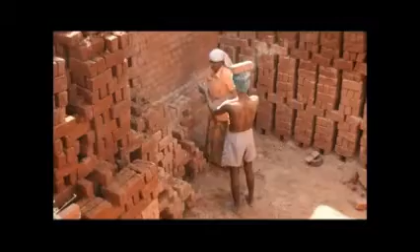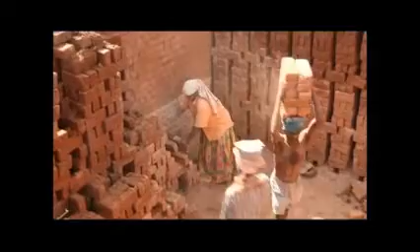The labor involved for the production of bricks is completely high. The process of manufacturing a brick takes a very long time. Women and children are swept off from their future for the inhuman labor that is involved for manufacturing bricks. The manufacturing involves a lot more physical labor than mechanical labor.

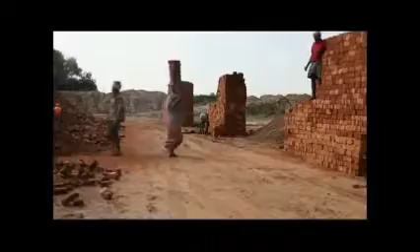Every nation owes it to the success of its laborers. Since the Industrial Revolution, labor has been the driving force of our economic and industrial progress. Though labor has its advantages, the rich get richer and the poor get poorer. Families suffer.

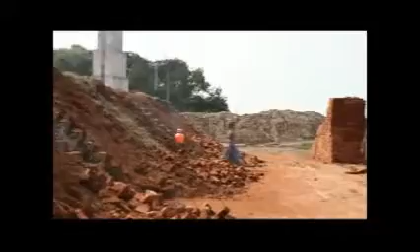We will show you the relationship between electricity and bricks. Our lives revolve around electricity all the time, making our city look so attractive. Here we are looking at one of the most important power plants to day-to-day life. For the production of electricity, coal is the primary source.

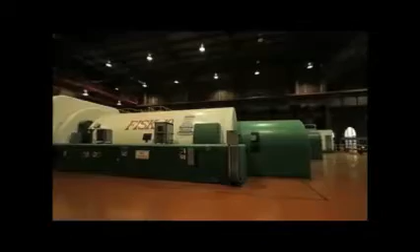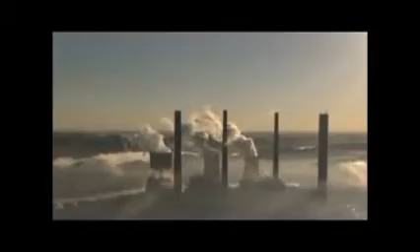How do we generate electricity? Yes, we all use coal. Coal is the primary source for everything. Neyveli supplies fly ash to different parts of Tamil Nadu. Right now we take a virtual tour of an electricity producing power plant which uses coal as the primary source for it.

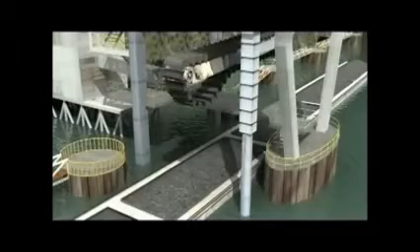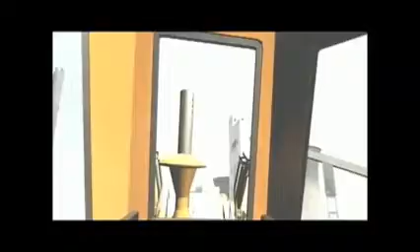Coal, as we all know, is transported from various parts of the world and is used for producing electricity. Coal is collected first and then a conveyor belt is used to collect everything and roll it towards a container.

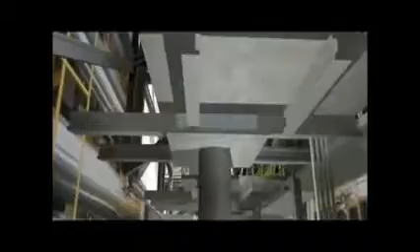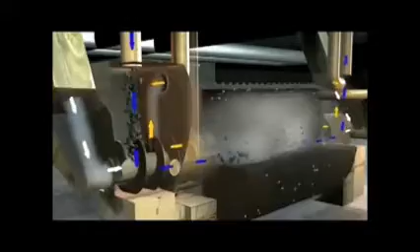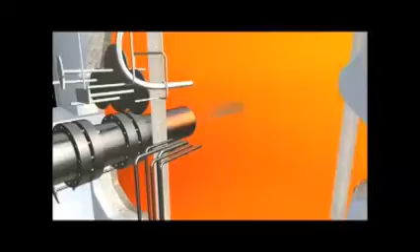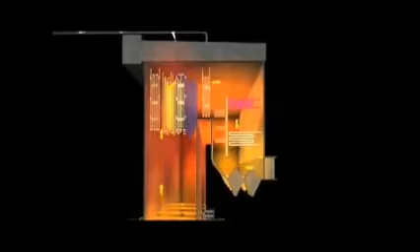The next important step is to crush the coal into fine powder and then feed it into an inferno of a boiler. The boiler heats up to a point where the fine powder is converted into thermal energy by the heat produced. Using several condensers, the thermal energy is then converted to electricity using several turbines.

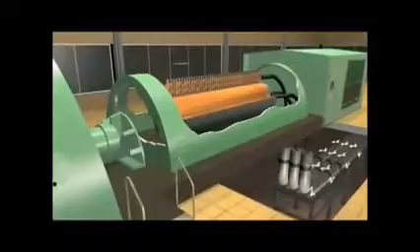Transformers supply the electricity from power plants and it travels through a high-tension wire. The high-tension wire transports the electricity to several substations around the city. And the substations, after receiving the electricity from the transformer, supply it throughout the city.

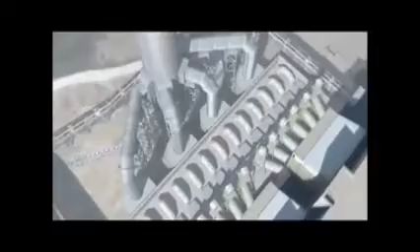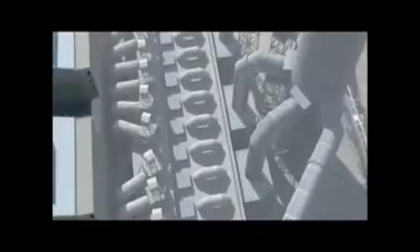The combustion of pulverized coal at high temperatures and pressures in power stations produces different types of ash. The fine ash fraction is carried upwards with flue gases and captured before reaching the atmosphere. The coarse ash fraction falls into the grates below the boilers, where it's mixed with water and pumped into lagoons. This material is known as furnace bottom ash. It has a gritty and sand-like texture.

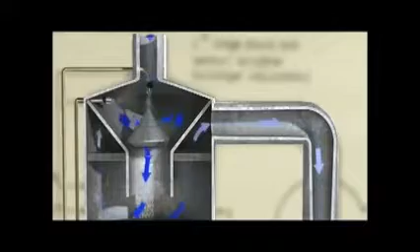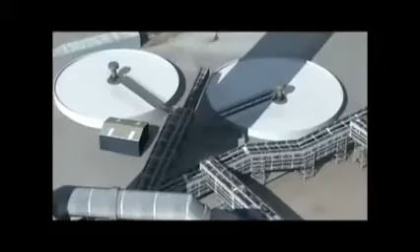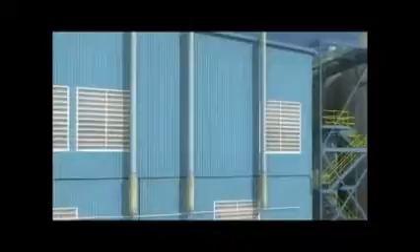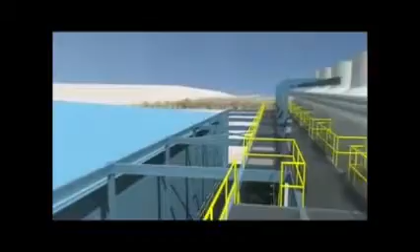Gypsum is the byproduct of coal while manufacturing electricity. Gypsum should be free of lumps. Lumps, if any, should be screened and the remainder over the screen should be crushed and re-screened before use. Gypsum should be tested for purity as per IS 1288-1982. Its purity should be above 80%. However, in case of variation in purity, the percentage of gypsum in the mix should be adjusted to obtain the desired quality of finished bricks.

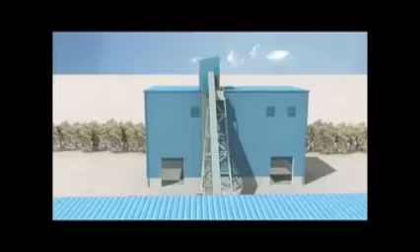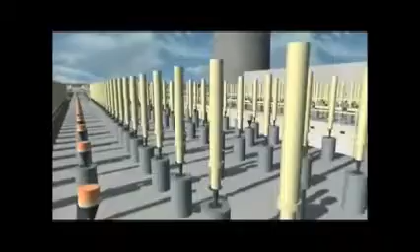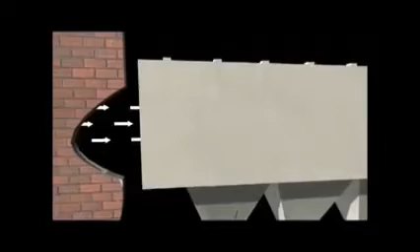Fly ash brick is a building material specifically for masonry units containing Class C fly ash and water. Compressed at 4000 psi and cured for 24 hours in a 150-degree steam bath, then toughened with an air entrainment agent. Owing to the high concentration of calcium oxide in Class C fly ash, the brick is described as self-cementing. The manufacturing method saves energy, reduces mercury pollution and costs 20% less than traditional clay brick manufacturing.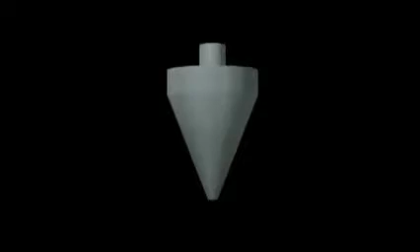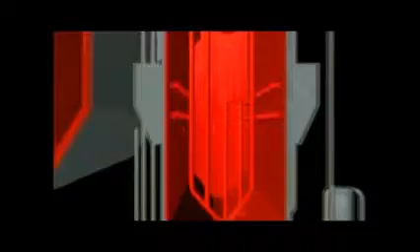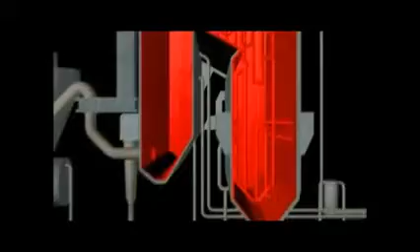Fly ash is a coal combustion byproduct, a finely divided residue resulting from combustion of coal in power plants. In thermal power stations, coal is pulverized into fine powder and pumped into the boiler along with compressed air. Coal powder is fired to generate heat, which in turn produces steam to run the turbine. After burning, the coarse ash or the bottom ash gets collected below the boiler. The finer particles of coal are collected in the electrostatic precipitators. This is fly ash.

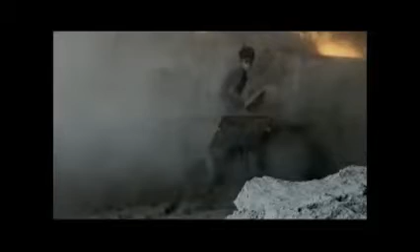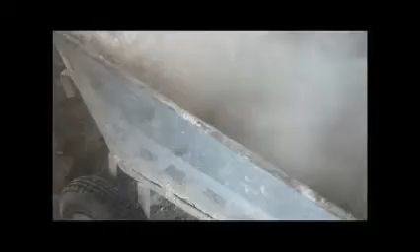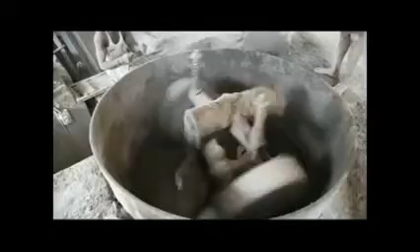The manufacturing process of FaL-G bricks requires fly ash, sand, stone dust, lime and gypsum to be mixed in a suitable proportion. Lime and gypsum are first ground in a pan mixer with optimum water. Ash, sand, stone dust are then added to the pan mixer to form a uniform mixture. When cement is used in place of lime and gypsum, first fly ash and sand, stone dust are mixed in the pan mixer and then cement is added into the pan mixer.

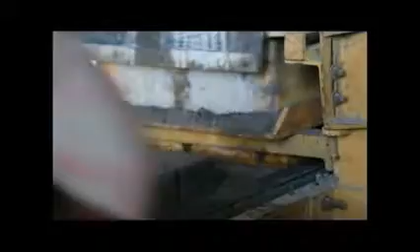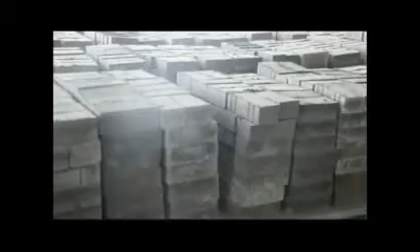Water is added into the pan mixer once the uniform dry mixture of fly ash, sand, stone dust and cement is achieved. The mixture is then transferred into the molding machine, where the FaL-G mixture is either hydraulically pressed or compacted through various vibratory presses. Once the bricks are taken out of the mold, they are dried for about 1 to 2 days. Water curing is then done for about 14 days to allow the required strength to be achieved.

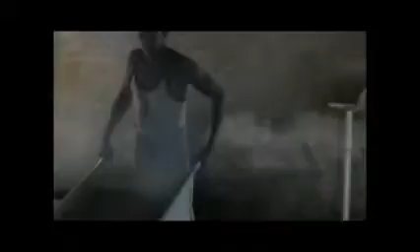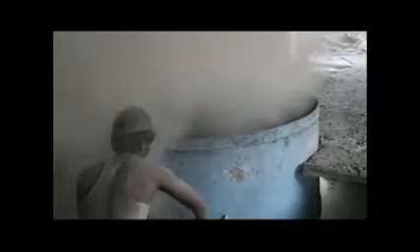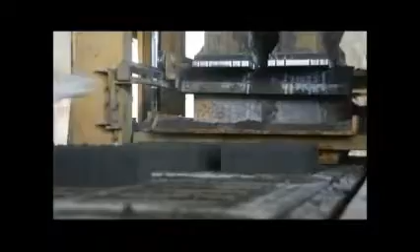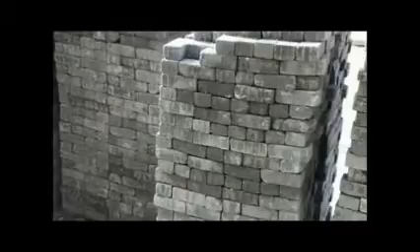Now we look at the composition of fly ash produced bricks. They are... The concept of fly ash bricks is used by one of the most famous builders and promoters in Chennai.

I am P. Muthukrishnan. I have been in construction related works for the past 10 years. I personally find that these fly ash bricks are better and more economical than the normal clay bricks.

The fly ash bricks are also said to be eco-friendly. If you see, fly ash bricks are composed of 3 raw materials: fly ash, gypsum and lime. These raw materials are mixed in a correct composition to make the fly ash bricks.